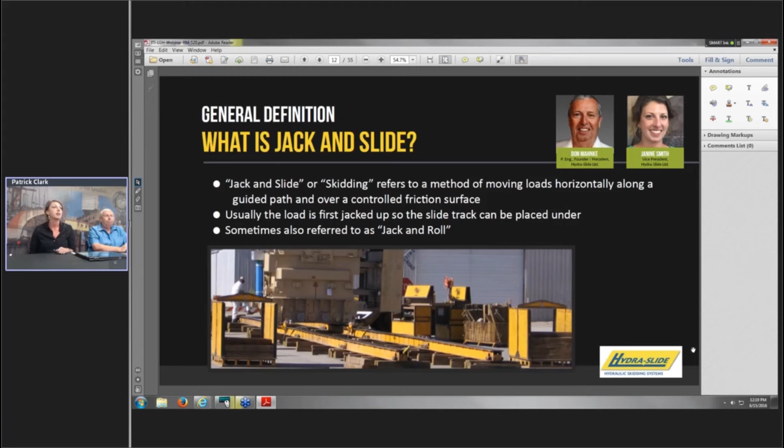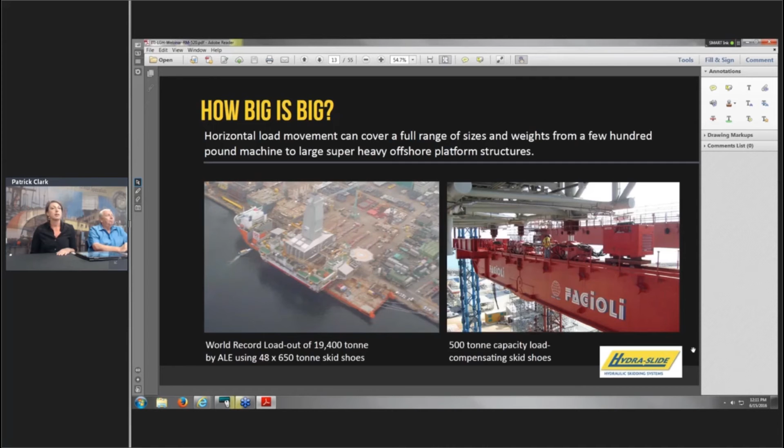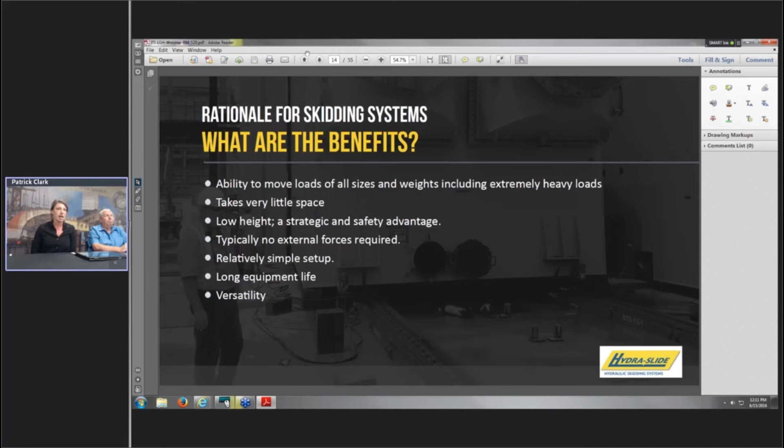So some of the benefits of using a skid system over some other methods: a skid system doesn't care what it's moving. It can be used to move transformers, vessels, components of oil rigs, refinery components, machines. Everything moves exactly the same way.

They take up very little space. Very small footprint. You'll see a little bit closer detail the layout of the tracks and the components of the skid system. Very low height. The Hydra-Slide systems, the maximum profile on our systems is an 8-inch profile on the heaviest tracks. It can go down to a 1-inch profile as well.

Typically, there's no external forces required when you're using a skid system. I talked a little bit about rollers. If you're rolling something on a low friction surface, you have to be aware that it's not necessarily lateral movement, and you're not going to necessarily go where you intend to go, depending on ground support and other factors. So there have to be winch lines, some holdbacks, something in place to stop that movement if you want to. With a skid system, it's a simple setup.

I mentioned cranes. Mobilizing a crane is a job in itself. It takes a lot of time and money to mobilize it. In some situations, it's the only option. In other situations where a skid system can be used, your setup is very short and simple.

And our equipment lasts a very, very long time. The first systems that were built by Don are still being used in the field, and that's going on 30 years ago. So a little hydraulic component maintenance and some graphite on the tracks, but there's not a lot of things to fail and to need maintenance on a slide system. And they're extremely versatile. I mentioned before, a slide system can move pretty much anything of any size.

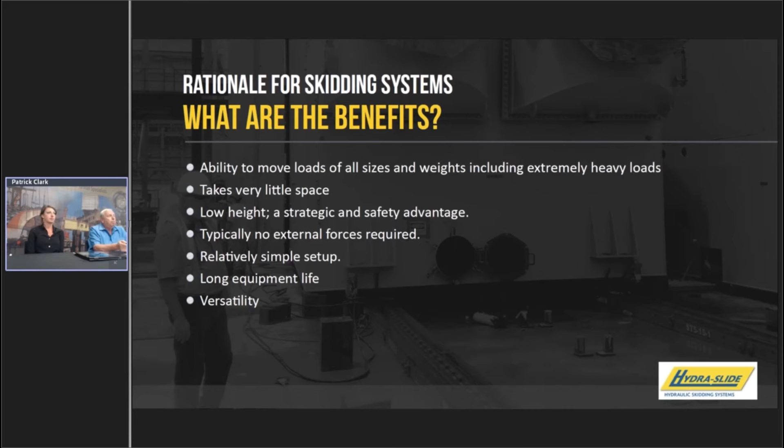So in the mid-1600s, Sir Isaac Newton, which I'm sure everybody is aware of, was one of the first people to be aware and to study the force of gravity. He got an understanding of how pieces moved, and some of the physics that sit behind that. And if I asked most people if they could recite what Newton's 3 laws of motion are, most people probably can't. But if you look at what they are, you'll recognize them right off, and you'll probably say it's much more of a common sense thing.

So his laws of motion, his first law is an object will remain at rest or move at constant velocity unless acted upon by an external force. Pretty basic. The second law is acceleration and force are vectors. Now what a vector means, it only means that it's something that has quantity and direction. So if you're talking about force, it's a force in a certain direction with a certain quantity. For the third law, it's every action, there is an equal and opposite reaction. This comes in with a lot of moving, because if you push against a move, technically it's pushing back on you. So often it's that back force push that you really have to deal with.

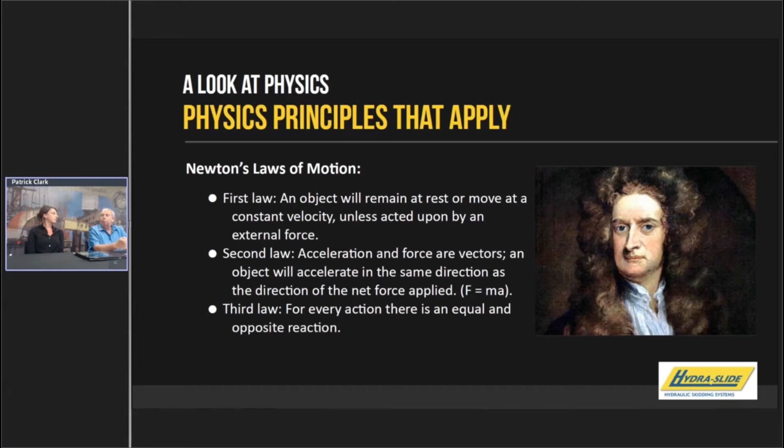Along with that, if you extend that a little bit further, we can talk about inertia. And inertia is a tendency to do nothing or to remain unchanged. And that is right back to Newton's first law. And then we get led into momentum. And that's a quantity of motion of a moving body, and it's measured as a product of its weight times its velocity. It really means that if you've got something with some weight that's moving, it's got what we call momentum. And I think everybody understands what momentum means.

The really important part of it all is the energy that's involved. And if we talk about kinetic energy, that's the energy that something possesses by virtue of it being in motion. And this is where it's calculated by its weight times the square of its velocity. So if you've got something moving at, say, 1 mile an hour, if you double that to 2 miles an hour, it's got 4 times the energy. If you double that again to 4 miles per hour, it's got 16 times the energy. So this is where, when we're dealing with heavy weights and horizontal moving, we really want to keep the speed to a very minimum to keep the energy levels down.

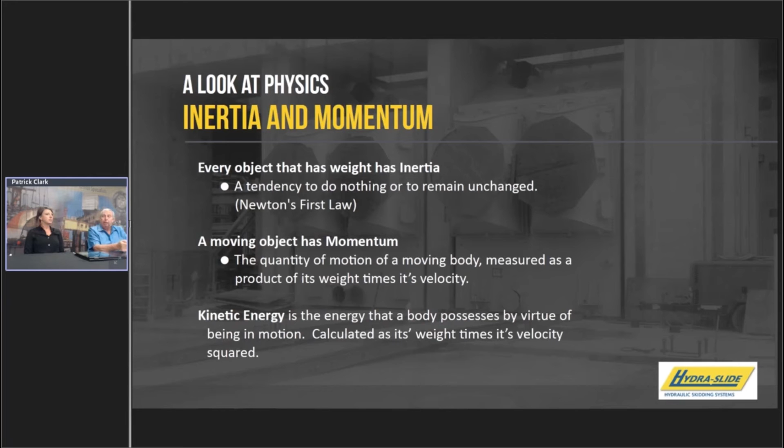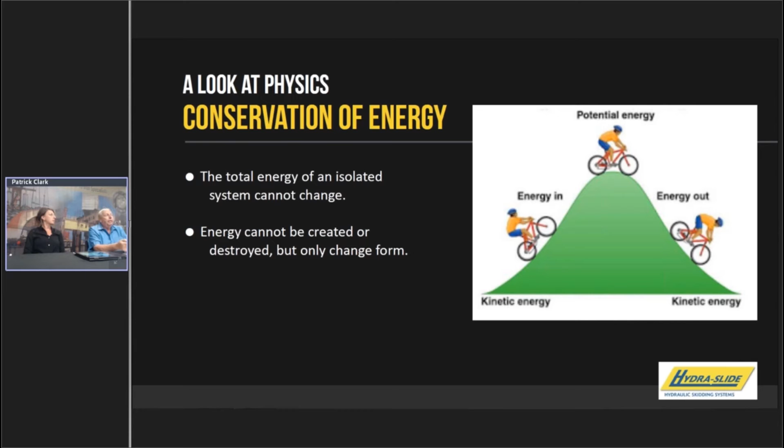And also, when we're talking about energy, there's two different kinds. There's potential energy that's really due to its height. This is where it comes in with cranes. If you're lifting an object to a height, you're putting potential energy in it that can then be translated. If it's released, it falls down and it builds up what we call kinetic energy, and the further it falls, the more energy it's going to have. And again, this kinetic energy is what we really have to watch out for.

And further, and this is getting a little bit more into what we want to talk about today, is friction. Friction is the force resisting the relative motion of two surfaces sliding against each other. And we'll often refer to the coefficient of friction. That's the ratio of the force of friction divided by the weight of the load. And when we talk about skid systems, we're normally working in the range of 10 to 20% coefficient of friction.

And what this really means is if you're moving something that, say, weighs 250 tons, and you've got a coefficient of friction of 20%, the force required to move it is 50 tons. So it's going to take you a force of 50 tons to move that 250-ton load. On the same hand, if you're moving that 250 ton on that friction, it's also acting like a braking force. It's an automatic brake. So if you stop pushing something, this friction is going to be acting like a 50-ton braking force to keep it from moving further.

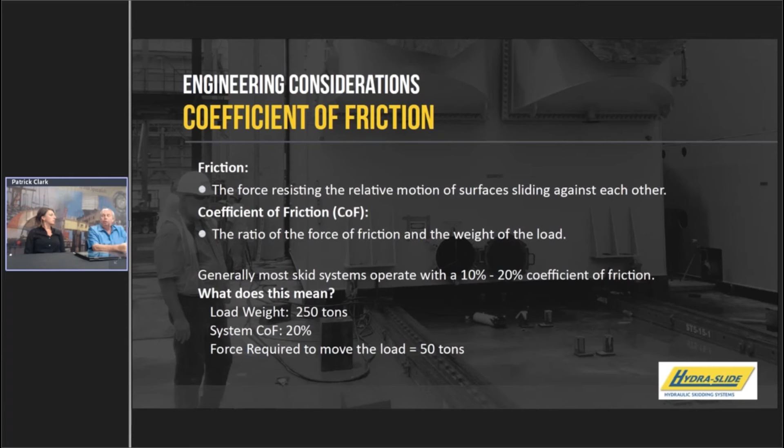And that's, as we call it, a controlled friction surface. It's something that is pretty much a known quantity and doesn't change much. It will change a little bit as it's wearing down. Humidity will affect it a little bit, but essentially you're in a controlled friction arrangement there.

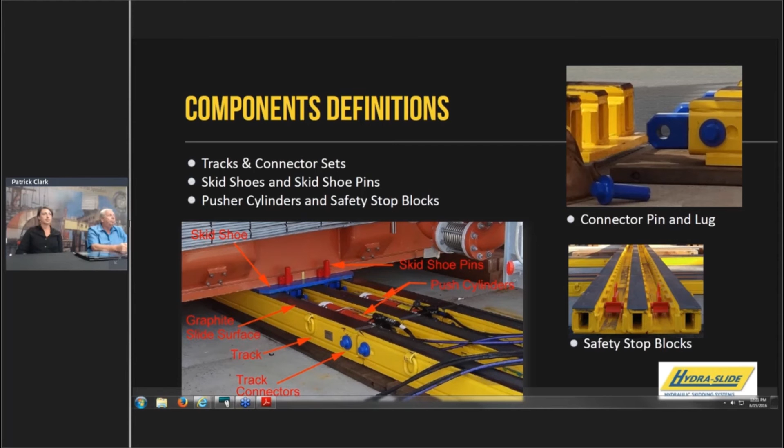So thank you. Now my clicker doesn't work. Go ahead. There we go.

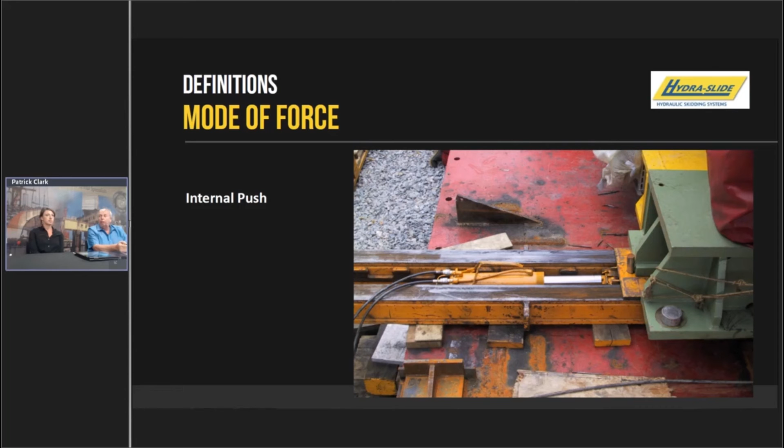Now, we talked a little bit about the internal portion. This is another close-up view of the hydraulic cylinder. At the bottom you can see the ratchet track. The cylinder is pushing against the track, and on the other end it's pushing against the shoe, which has friction between the shoe and the track. That cylinder has a 50 to 55 ton push capacity, but that entire force is kept within the track system itself, so nothing outside of it is experiencing any forces at all.

I want to talk about which of the physics we discussed apply to the skidding system. Friction definitely applies. It's very slow, controlled movement. We normally operate in the range of 10 to 20%. It's a very high coefficient of friction, but it acts as a brake to prevent unwanted movement. Even though it takes a bit more to push, we have that push capacity in the track system. Guided or unguided: skid systems are definitely guided. They will direct your load exactly where you want it to go.

Going back to potential and kinetic energy, the loads we're moving are generally at a very low height and very slow, so you don't have any significant potential energy, and due to the slow movement, you have very little momentum and very little kinetic energy buildup. So you don't really need to take undue precautions against the buildup of energy. And we mentioned pulling at angles, which you often do with external forces. With the skid system, your forces are always directly in line with the track, so you're not risking pulling at angles at all.

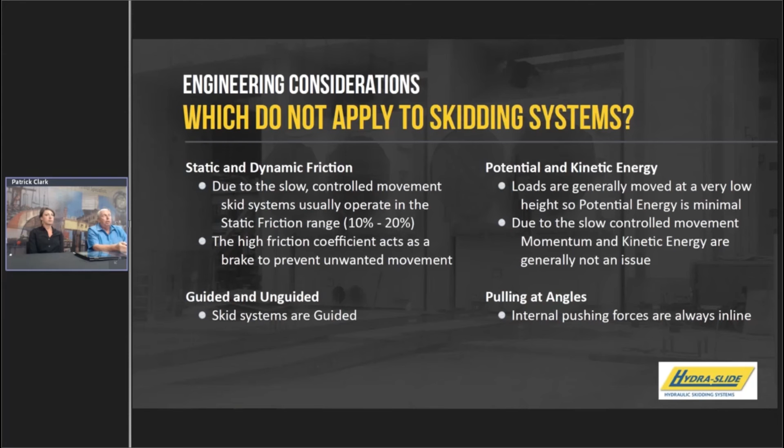You're pulling one direction, you've got winch lines around, you've got tripping hazards, you've got dangers with the winch lines, you've got the holdbacks. If your load starts to run away on you a little bit, you have to be in a position to be able to stop it. And once the load starts to run a little bit, it starts building up energy, it could become a big problem. And further to that, in placing the rollers, the guys were always in there placing the rollers with their hands. Always kind of a concern to me for the safety. We never had any injuries, but maybe that was more luck than anything.

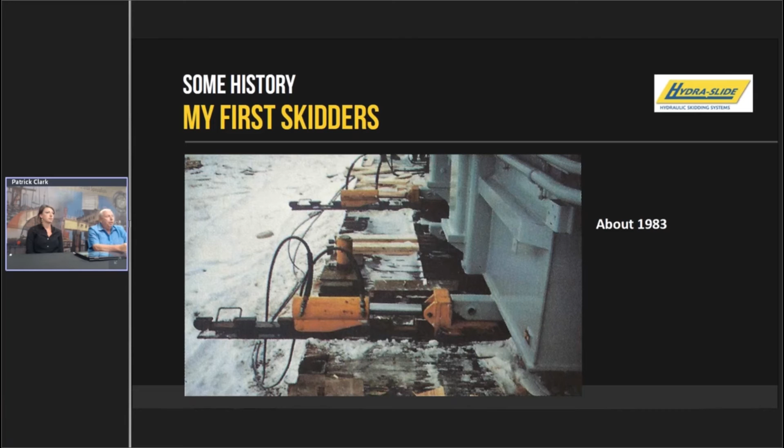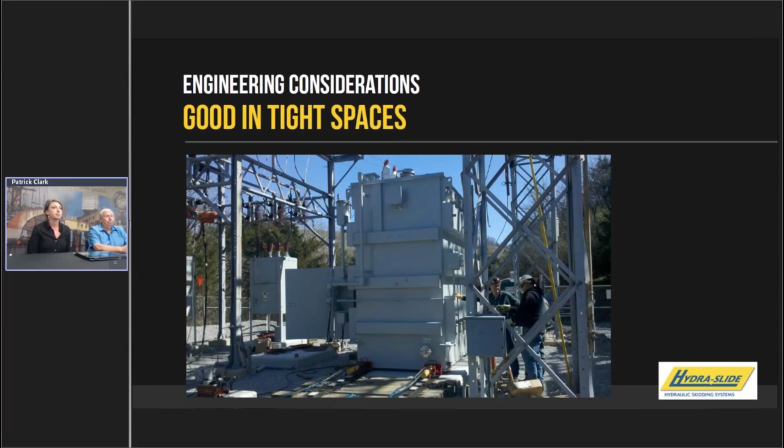This one here is one of the heavy track systems. Don's already talked a little bit about the precise movement. Where you lay your tracks, that's where your load's going to go. There's no risk of your load going in an uncontrolled direction or ending up not where you want it. And it does move relatively slowly, and some people say, can't it go faster? If you're moving a 500-ton piece, how fast do you really want it to go?

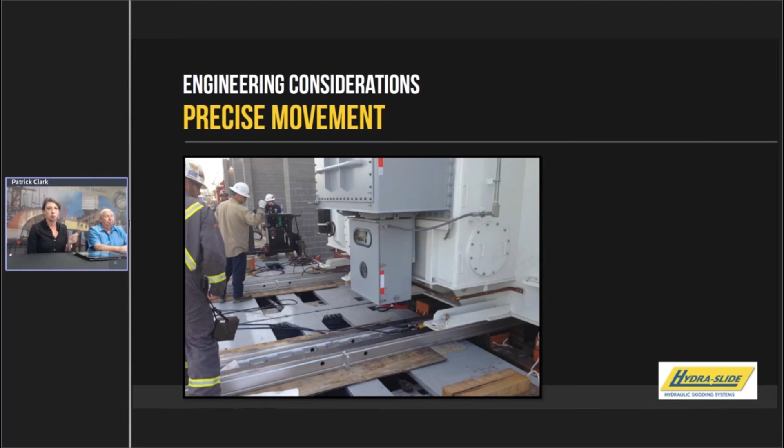With the synchronous power units that we offer and LGH offers for rental, you go about 60 feet an hour, which is still a good rate, and your mobilization time is a lot reduced from some other types of equipment out there. So with that being said, you're moving not that fast. You can precisely place your load onto a transformer station, onto a rail car, wherever you're moving it, within a quarter inch. We have guys out with tape measures measuring exactly where they want that load to be placed.

And the surface conditions aren't that much of a consideration with the slide system. You still need to know what your ground pressures are and what kind of surface you're going on. But you can lay mats down, steel mats, wood mats, to spread the PSI out over a long span, and then place your load over it. So that's in northern Alberta, where they typically have very sandy, kind of loose soil.

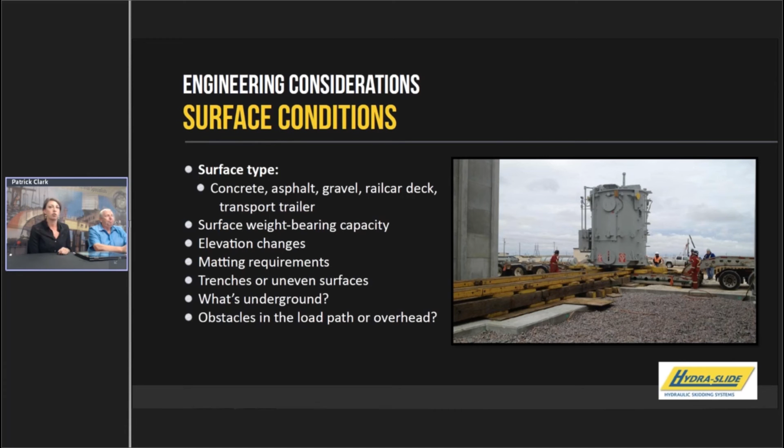This slide here is showing a vessel being skidded, and you can see in the photo that the track is spanning gaps of several feet with this load. They've basically got some blocking under the connection point, which the connection points always need to be blocked because, as you saw in the photos before, it's a pin and lug, and there is a little bit of a gap there, so there's no strength in that track at that point. Other than the connection points, the slide systems do come with a stamped engineered load capacity chart that's on the left side of the screen.

So you can calculate exactly how many feet you can span between block piles depending on the weight of the load that you're moving. The way it's read, the vertical column is your weight per skid shoe. Typically you're using 4 skid shoes. You could use more if it's a different configuration that you've set up, but we'll go with 4 for this example. And the horizontal axis is the feet that can be spanned between block piles, between blocking. So if you look on the left, that's in 1,000 pounds.

If we calculate based on a 200,000-pound transformer, which is 100 tons, your weight per shoe would be 50,000 pounds. So if you go to 50,000 pounds on the vertical axis and over, you can span a gap of 12 feet between block piles. A lot of times our customers will block a little bit more just because the safety guys and the customers like seeing more blocking, but the track is strong enough to take that load over that span.

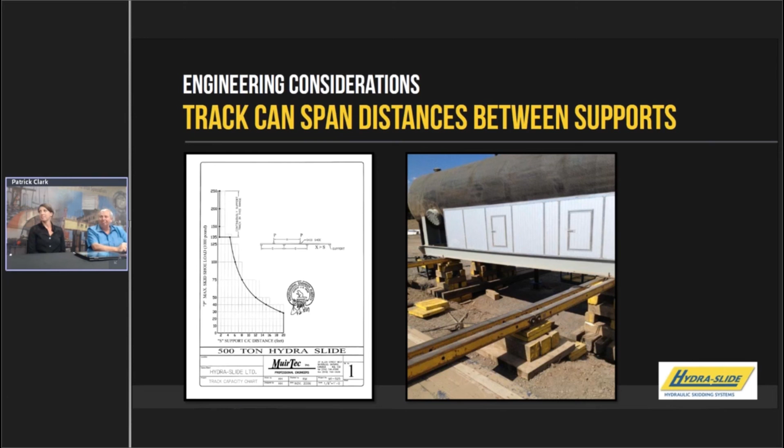And I'm going to pass it back on to Don to look at some unconventional applications, just kind of more of what Pat was talking about, that it's not just for one type of load. There's countless ways, and some of our customers approach us with, could we use a skid system for that? Yeah, that's a great idea.

Yeah, thanks, Janine. And this is getting back again a little bit more into my history, but it's to your point, Pat, exactly. The skid system, anything that has to be moved horizontally, you probably can use a skid system to do it. This was a large diameter storage tank. We had to move it on site there and then put it on the barge to take it to another town. One of the obstacles we had was we had to cross a river.

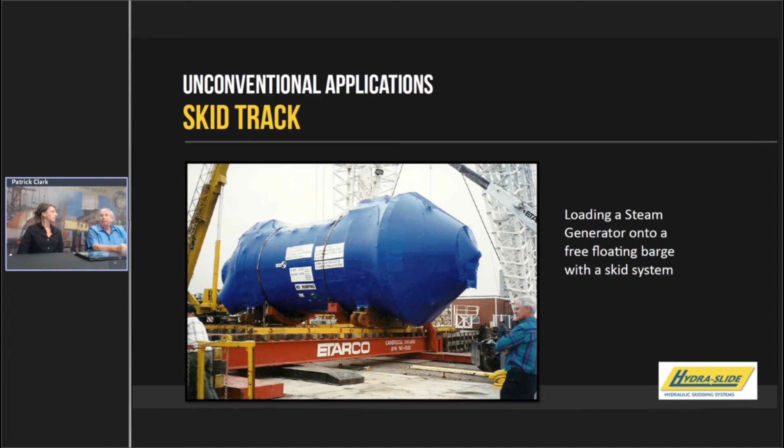So when we talk a lot about cranes, and we certainly don't want to diss cranes by any means at all, because they're one of the most common, useful pieces of equipment on any construction site. But because they lift the loads almost cantilevered with a boom section, and the load is suspended, they're subject to a lot of different forces.

Some of the other constraints with a crane depend on the availability, what size your load is, restrictions to the setup area, overhead clearances; we talked about that a little bit. But again, with the laws of physics, they're very susceptible to motions that your load takes. In fact, you can almost consider them inherently unstable because the load is suspended. It's only held there basically because of the weight of its machine.

It's on a balance. You've got the load hanging off the end of your hook, which can be balanced by the counterweight, the overall weight of the crane. Should any of those things change, if your load weight increases or your lift radius increases, those will increase your overturning moment with no correction in the righting moment.

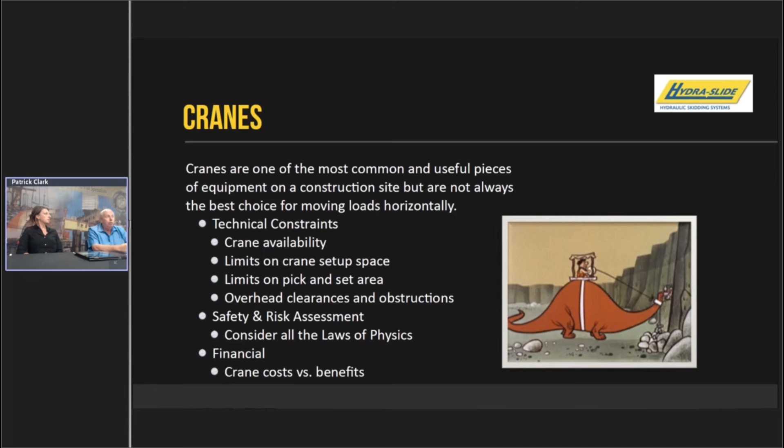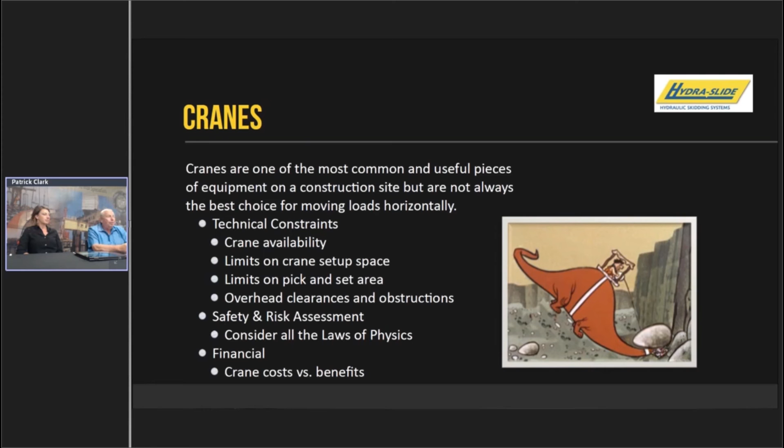And I've got to apologize for the next slide a little bit here. If you do that, if you go a little bit too far, you lift a little bit too heavy, you risk the instability of the crane. So again, my apologies for a cheesy slide.

It's a little bit labor intensive, small equipment. It takes a certain amount of time to set it up and to use it. So it doesn't make that much difference if it's moving a 50-ton load or a 400-ton load. Whereas a crane, it's almost the opposite. If you've got a 40 or 50-ton load, it's very easy to get a hydraulic crane, pull in, pick it up, move it. But with cranes, once you're getting to the higher end, if you're getting into several hundred ton, 300, 400, maybe 500 ton, your crane costs become rather exponential.

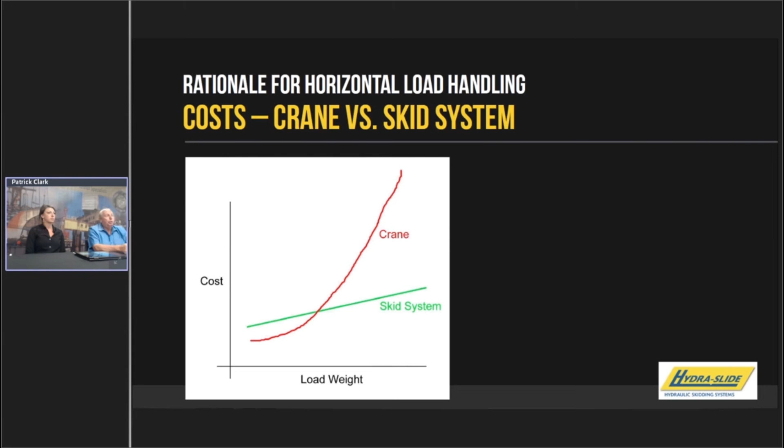So at some point there's a crossover, and this is what is showing there. Lighter loads, often the cost effectiveness may favor a crane. Once you get a little bit heavier loads, the cost effectiveness may favor a skid system. This is going to change a little bit depending on the availability of cranes, where you are, so many things, but there does usually tend to be a crossover point. Where we were, normally the crossover point was somewhere between 80 and 100 tons. Below that, if you could use a crane, sometimes it's more financially feasible. Once it was over about 100 ton, then it much more favored the skid system. That's a good bogey to consider.